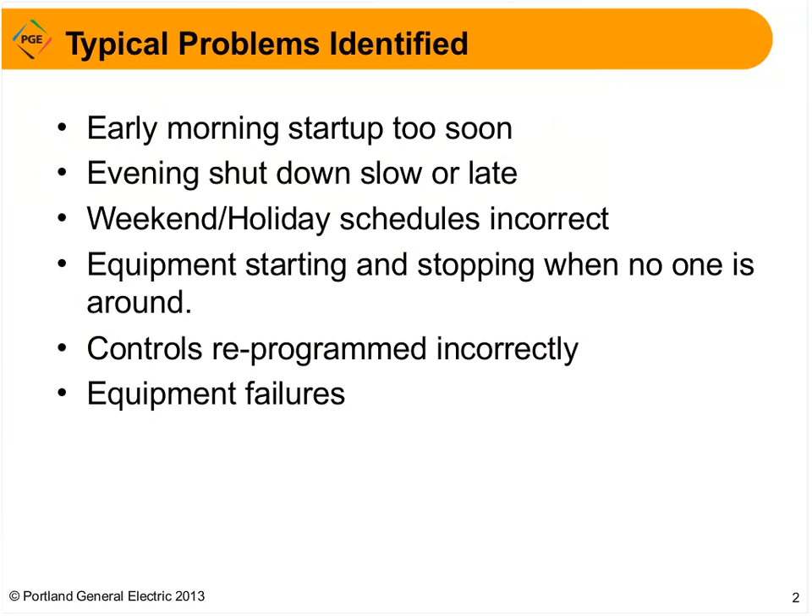Finally, something included in the packet that we'll be sending you is the facility checklist. That is something you can use, if you want, to provide your operating schedules in comparison to what the charts are actually showing you within Energy Expert, just to make sure that those match and line up, so that if there are any issues with data, you can let us know. But this is just something additional that we provided in that packet.

So I'll go ahead and open up the Energy Expert applications, and that is going to be using a different URL than you're accustomed to. At the old legacy version, we would have been going to www.myworksite.com, and in this case, we'll be using www.northwriteinc.com. I shared my desktop so that you can see that application.

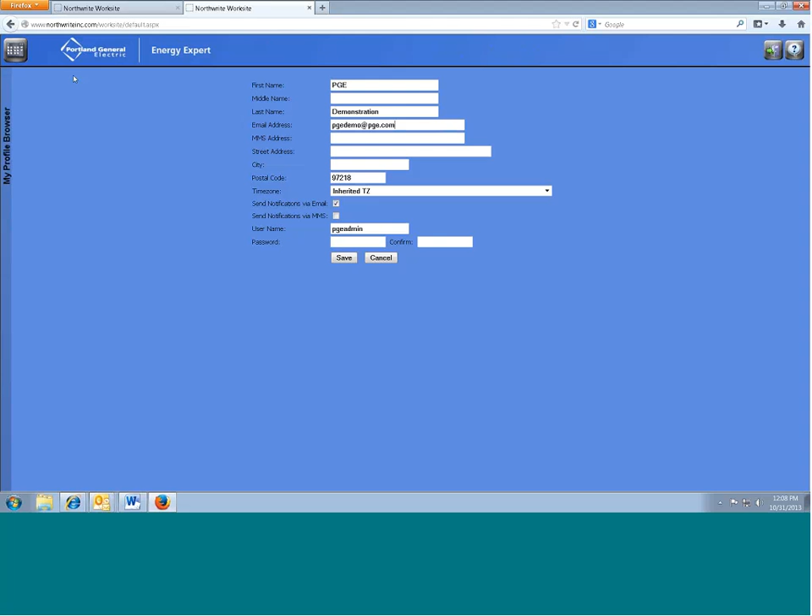Going back to the desktop, I'll show you real quick some support options available for anyone not able to attend a training. There's a lot of additional documentation available, either written or in video format. Each of these links are the tools available, and as you click into these, it opens up a page with thumbnails of videos recorded for various functionality within each tool. These are about 2 to 3 minute short instructional videos. And this link up here is written help content, so you have a couple different ways of accessing instructional material.

As I said, these were some administrative applications. If you have some schedules set up, and I'll be showing you how to do that, this is an application that just lets you administer that. It's very straightforward, and we have the video on that as well, so I probably won't be covering it unless anyone has specific questions. Then the dashboard sort of interacts with both the energy modeling and energy charting tools, and I'll be showing you that as well.

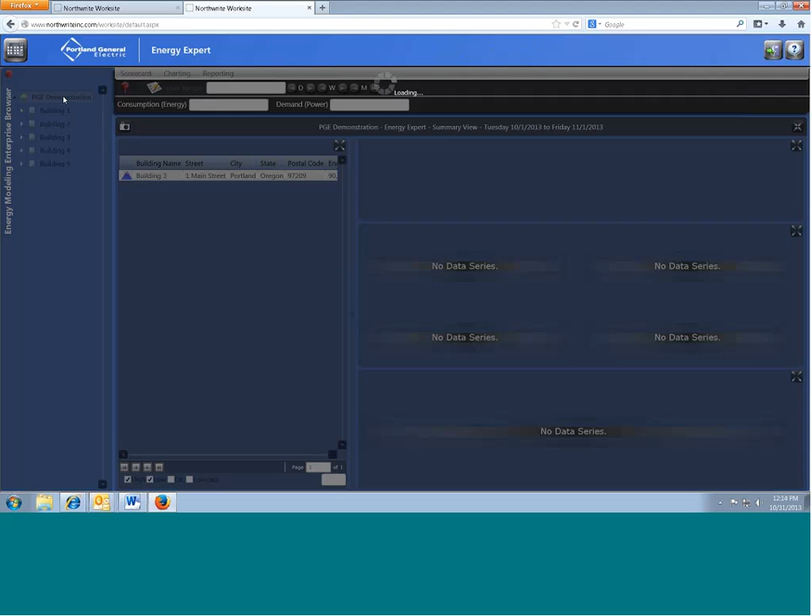But first, we'll go into the energy modeling tool, and we launch right into it. I've already loaded it today, so it brought me right in, but it will initially take about a minute or so to load. What I'm seeing here is the demonstration site at the building level, and I'm going to move this up to the top level. Whatever I've selected here in the left navigation determines the data on the right. What I'm seeing here is a scorecard view, which is the default screen selection.

And this shows a multi-site organization, so we see that there are multiple sites being charted here. And I can filter this to get all of the buildings in the site list here.

The first thing you'll notice, there's a lot of green here. What this is saying is that for the time period selected, the month of October, and for the whole organization, this was the actual energy consumption for that period as compared to the expected energy consumption. So it was within a 10% difference.

So the performance of that period is rated okay. We have a deviation band of a 10% range as a default, and so as long as the actual and expected energy is within that 10% range, it would be marked as a green or okay day.

As soon as you go outside those deviations, it would indicate a high or a low day. In this case, we don't have any high days. We just have all within the normal range, and one here that was actually below the normal range of consumption. How that's calculated is on an hourly basis, according to the interval data for the baseline period and in relation to the hourly temperatures for that particular day and hour.

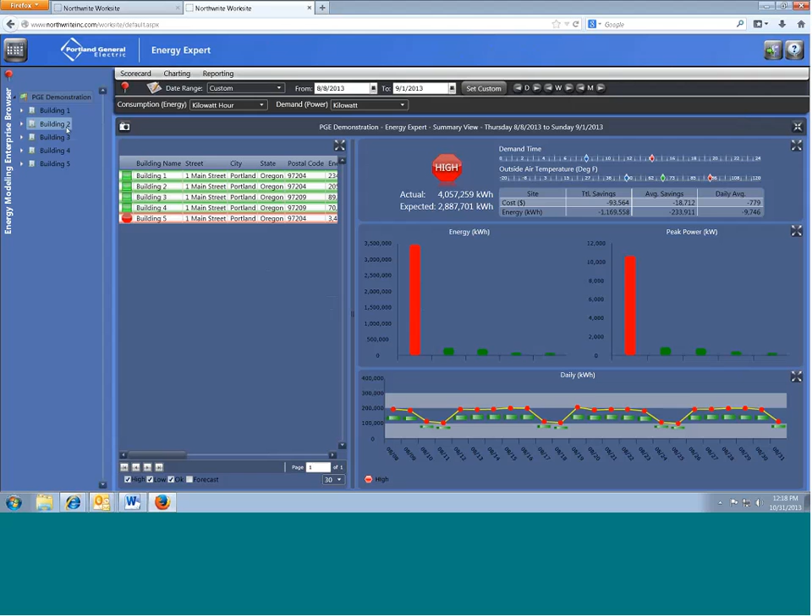So now I'm going to just drill down into a more specific level into the building. And for some people who have multiple meters, they would need to drill even further. For a sub-meter, in this particular instance, there's only one meter per building, so you're going to see the same data at each level. But for anybody that has multiple meters within a building, they would just need to select the appropriate energy expert node here.

This, again, we're still at a multi-day range, and you can see there's a pattern here with their startup on Sunday night and Monday. So things are kind of normal for this site through the week. This is a Saturday, I believe, and these are Sundays.

So we're seeing a definite issue here with this being a high day, and these all falling in the normal range. And you probably gathered the yellow line is the actual consumption for this building.

And we can see the impact of this too in terms of cost. So in this case, over this period of time, the difference in energy consumption between what the models expected and the actual was a negative 15,990 kilowatt hours. And that translates using a blended rate that we get from PGE, that we put into the software according to the location, to a negative 1279. So we're able to calculate that in terms of dollars as well as energy.

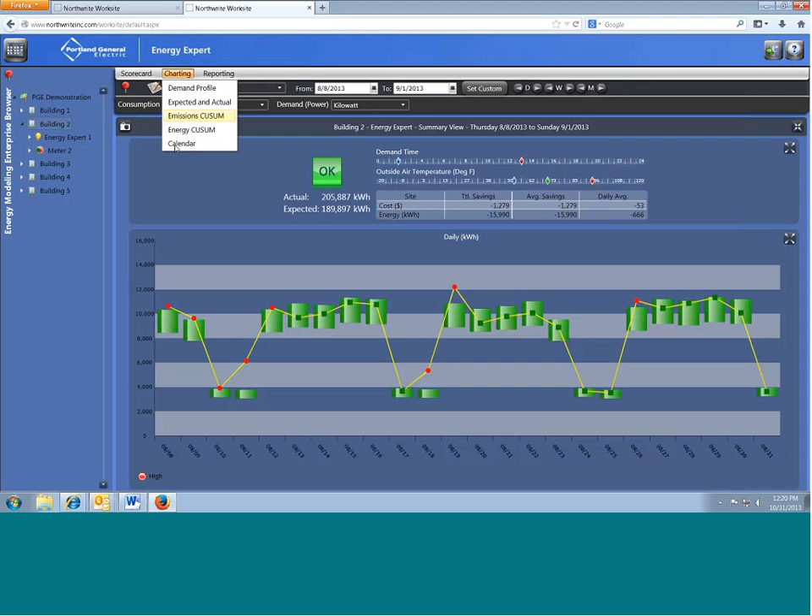So now I'm going to just jump over to the calendar to show you this same pattern over in the calendar view, to kind of give you an example of how you would see the same issues that are happening at this building.

Since we were seeing those red days on Sundays and Mondays, that's also what we're seeing here in the startup on Monday - a really early startup. So maybe they're starting earlier than normal, but that's what the model's telling us: on these particular days, in relationship to their baseline, the facility is using more energy than usual, and it's been given a high overall day. You can also see at the hourly level how that changes from red to certain parts of the day that are actually normal or low.

So you can look down to an hourly level of what the performance is for a particular site. And while I'm on this view, I'll show you what this little yellow indicator is - it allows you to see if there's been any notations made to address any particular anomalies or issues that are identified.

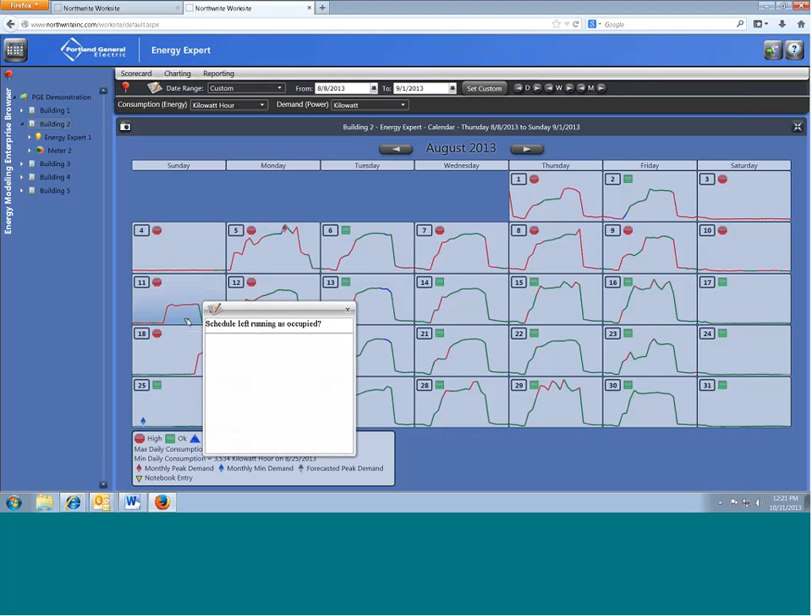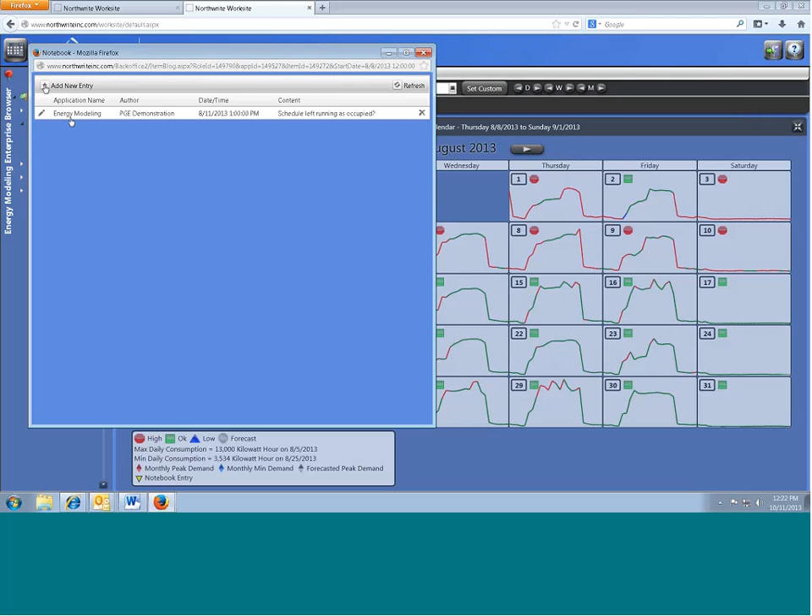Rolling over that little icon will show you what the note was that was left. In this case, we weren't really sure what happened at this building, but assumed that maybe a schedule was left running, and this could be confirmed by a facility manager. The note was actually input by clicking on this little notebook icon up at the top. That brings up a pop-up, so you would have to have your pop-ups enabled to see this interactive screen. This is the current note, so we can click on that to add more detail, or continue to make notes, or add another entry. That's the functionality of the note taking.

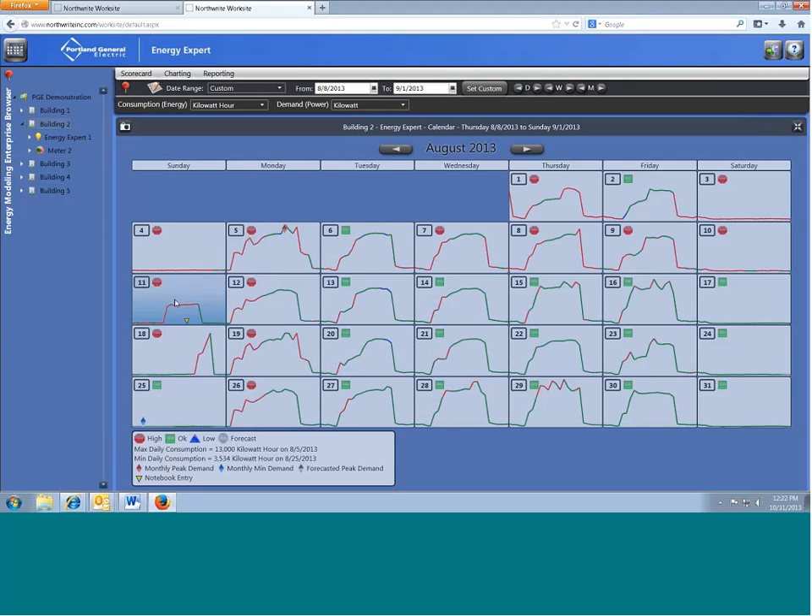If there's a significant day you probably want to look at in more detail, there's a few here, but I'll click on the 11th, and this will take us to the load profile, the demand profile for that particular day, giving us more detail about what's going on. Typically, the model's saying the actual should have continued throughout the day as a flat line, but on this particular day, it looks like it was occupied, or at least the schedule said the building was going to be occupied. So this gives us the 24-hour detailed look at that.

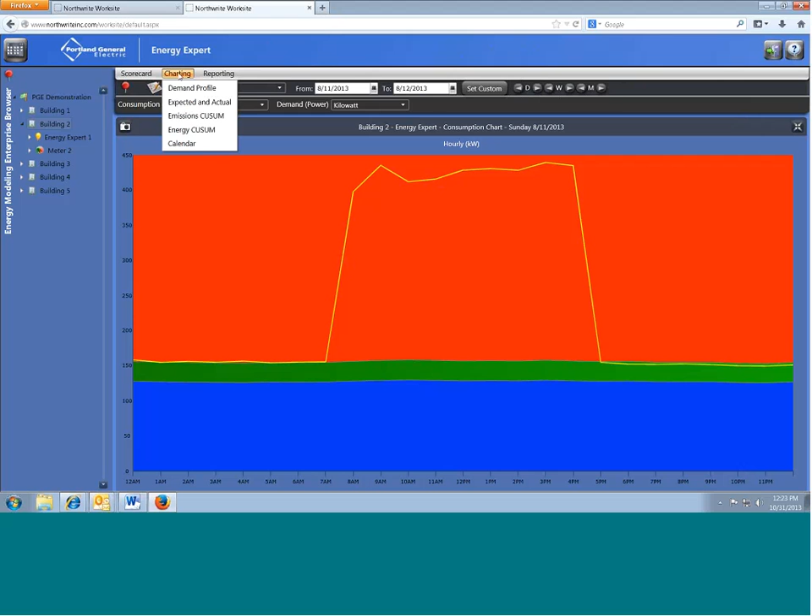Some other charting options are the demand profile, and this one is model independent. This is just charting the actual data in relation to different parameters available here on the left, where you can trace over different profiles within the data set that we have available.

So if you have several years of data, we're able to look at averages over a longer period of time, and you can also trace that with a comparison from weekday to weekend. This is your selected day, and this can also be a range of days. This just happens to be a single day, and we can expand this to include multiple days.

You can see it just adds more of the load profiles prior to the selected day. As you roll over these, you can get a tooltip that would come up - again, I think with the meeting format they're not coming up for some reason, but hopefully on your own there they are. There's a bit of a delay, I think. So these will provide the dates of the actual loads here.

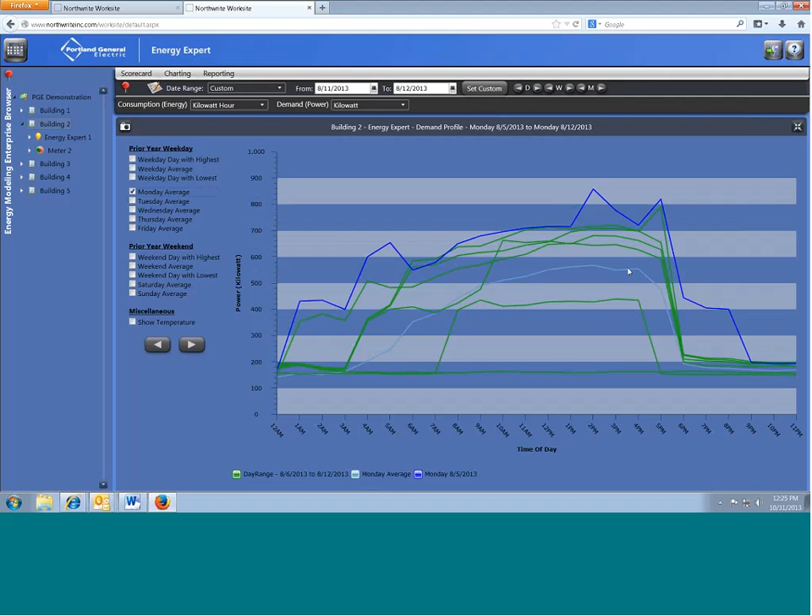And then if I want to trace that against an average, since this is a Monday, I might want to look at the Monday average - it would trace that in a different color, this light blue line here. So it was a lot higher. Of course, as you're looking at this, you can back up your selected day however you want using the buttons up at the top. We can also just look at the weekday average, not just a Monday, but the actual weekday, and that's really similar to that Monday average, like we would expect.

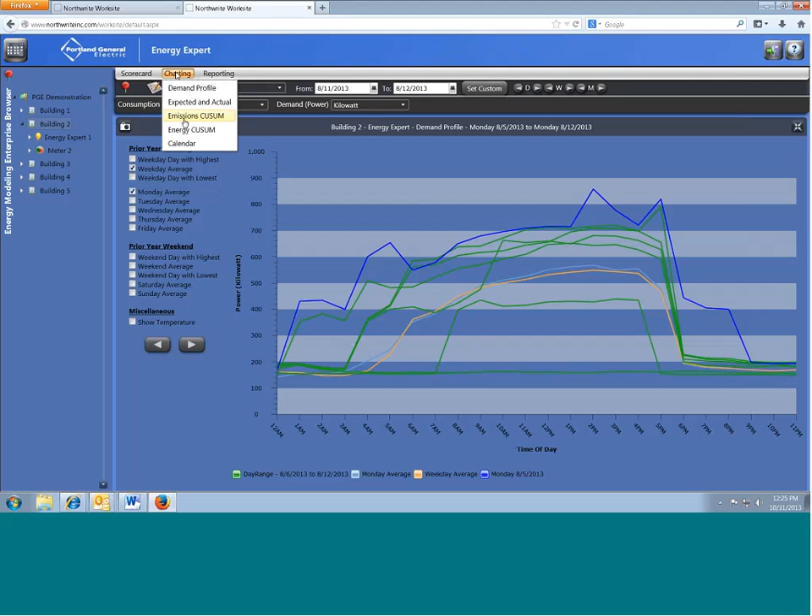Some of the other charting functions available - one that's useful, especially if you're doing any improvements in the facility, can actually measure the impact of those. What this chart does is provide a visual of the savings, the cumulative savings that result from whatever that improvement was. So again, you probably have a custom period, or maybe you might want to look at your whole post-baseline period to see what the savings are. That's going to be different for everyone, but we'll just say, in this case, we'll look at the entire year-to-date savings.

For this building, I wouldn't expect a positive result since we saw a lot of red days. That's going to correlate to a cost and not a savings. So the line will go left to right, downward, instead of left to right, upward, which is what we want to see. But this is how you would use this particular chart to assess the impact of any energy savings measures that were put in place.

Since it's a whole year, I think that's why it's taking a little time. There we go. So we can see it really didn't improve. It was pretty flat here until the warmer months. They really had some issues, and we kind of saw that in August for sure. So looks like they have a little work to do here.

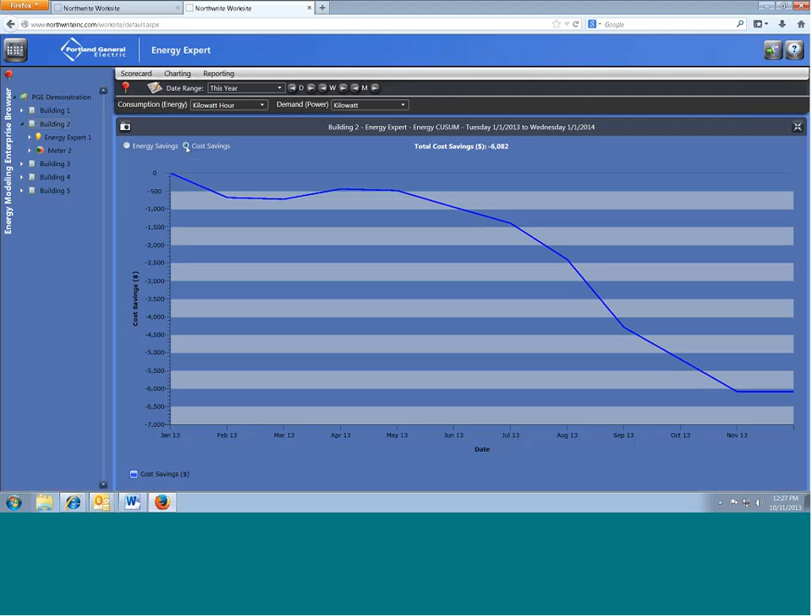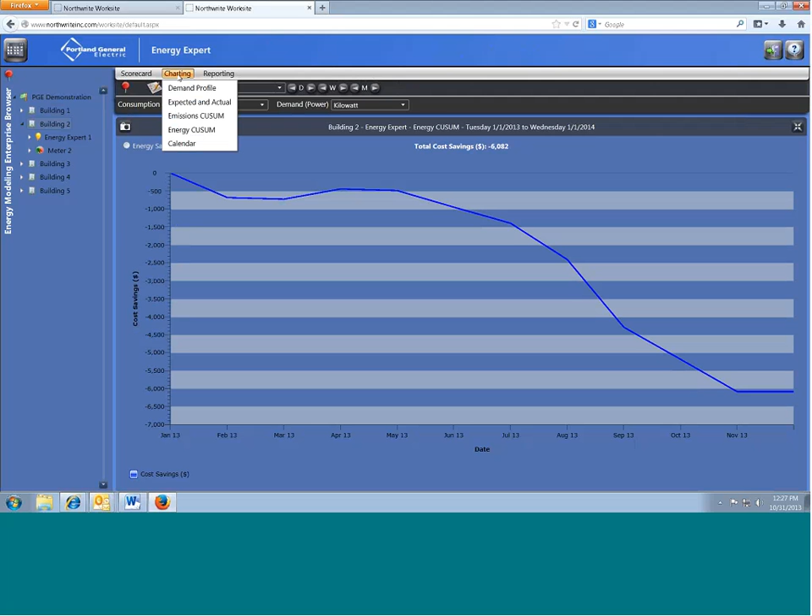Moving on to some other charts that are available. The emissions CUSUM is another one that you may or may not use, but it's there for your use or reporting. This chart just provides a tracking of the emissions put out per kWh, and depending on the time period selected, this would be the total CO2. We also do the other greenhouse gases here, but the default setting is CO2.

This does retain the last date range selection, so I'm still on the entire year, which is why we've got a little delay here. But when this displays, we have charting of the actual CO2 emissions, and we can also look at it in terms of the model and show how it's reduced. This is a factor of the performance at that meter. So we're always going to be accumulating CO2 emissions, but the red line is there to show the savings trend.

In this case, like we saw before, we had a downward savings trend. So we don't have positive reductions, we have negative reductions. It's going in that same relationship curve as we saw on the CUSUM chart.

While I'm here, I'm just going to go over the reporting functionality. We either have these already — these are some canned reports, the enterprise summary or the daily details. These just provide another way of looking at the data over time.

It also lets you drill into the data so you can see what's going on hour by hour, and even at the data collection level that we're using to determine that expected energy value you see on the scorecard.

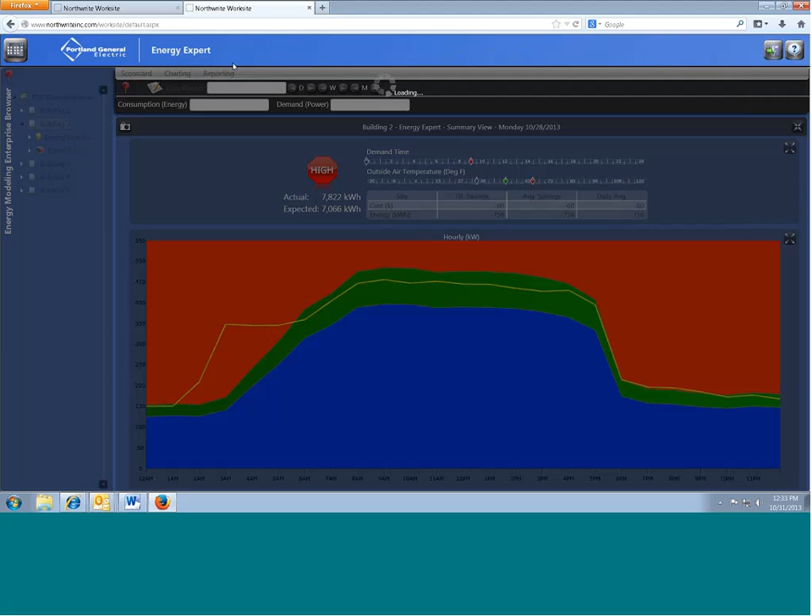Going back to the scorecard, another option for reporting is the X-card functionality. If any of you have already set these up, you've put in your email address and enabled the box that allows notifications to come through on the My Profile application. Once you've done that, you can start customizing what views you want to appear as a scheduled X card.

I'm just waiting for that screen to come back. We'll give it a minute here.

These X cards will show up in your dashboard, and I'll show you that too, how those display as thumbnails that you can delete and manage your scheduled X cards, and they also show up in your inbox.

So I think since I'm having some issues here, I'm going to just relog in. So you might have to bear with me here for just a moment.

As I was mentioning earlier, I'd already loaded some of these, so now you're going to experience the actual loading of each of the tools. But I first thought I would just go into the dashboard, since we were talking about how the X cards render to your dashboard. So in this demonstration site, some of the X cards I've taken and scheduled will show up as thumbnails.

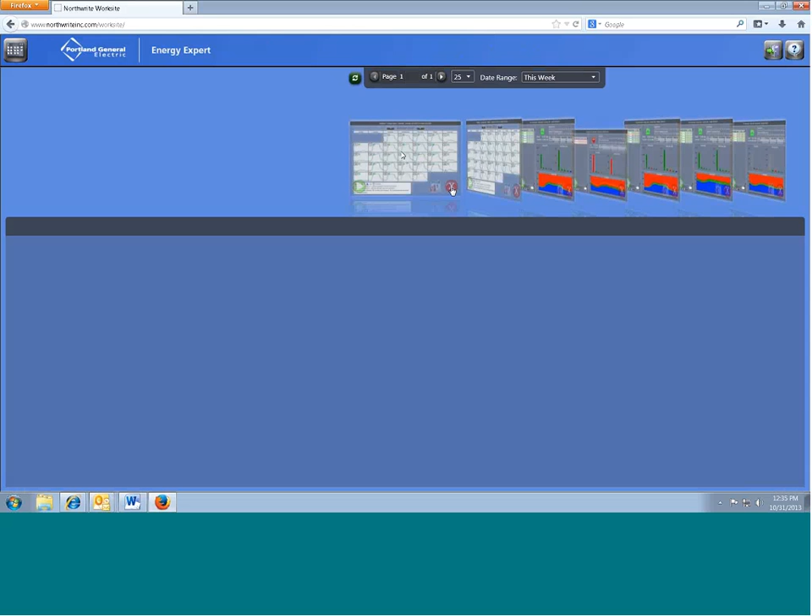So they can be deleted via the dashboard. This will also serve as a way to launch back into the application.

So if, for instance, the issue we saw at building 2 in August, we might have taken an X card of that as a single screenshot, and that would appear here in the carousel, and you would be able to come back to that and launch right back into that same scorecard view if you wanted to.

Oh, and it would also go to your email box if you wanted to forward that around to other folks in the organization. That's kind of the intent behind that. So this will launch you back into the application.

I'm highlighting this little calendar icon. This will delete your schedule if, for example, this one is a daily schedule of the scorecard. This would delete that, and this would just delete the thumbnail from your carousel.

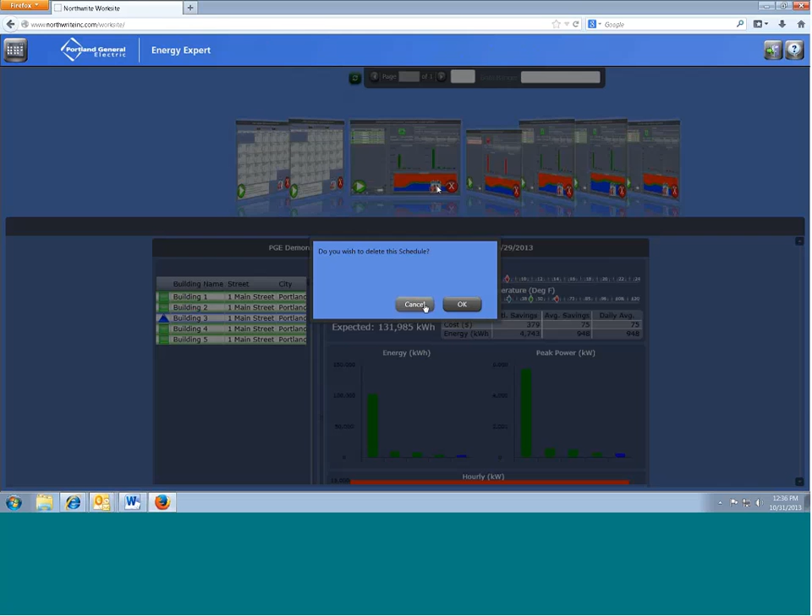So I'll go ahead and, actually, it does let you confirm your deletion, so I'll cancel that. And I'll go ahead and launch back into the application. So this will get us back into Energy Expert.

I've pretty much gone through all the functionalities I plan to show. So if anyone has any questions, feel free to ask them now. Otherwise, I'll pass this back over to Will, who has some specific examples of issues and problems with scheduling that he's been able to see with some real customers.

Okay, thanks, Gina. Like she said, I'll be going over some specific examples we found both recently and in years past. This one right here is a scorecard example. This customer, I was looking at the application one day, and I noticed this customer had an odd startup. You see down here at around 5 p.m., it starts to get a higher load, and this is on a Sunday when it's normally closed and unoccupied. So this struck me as kind of odd.

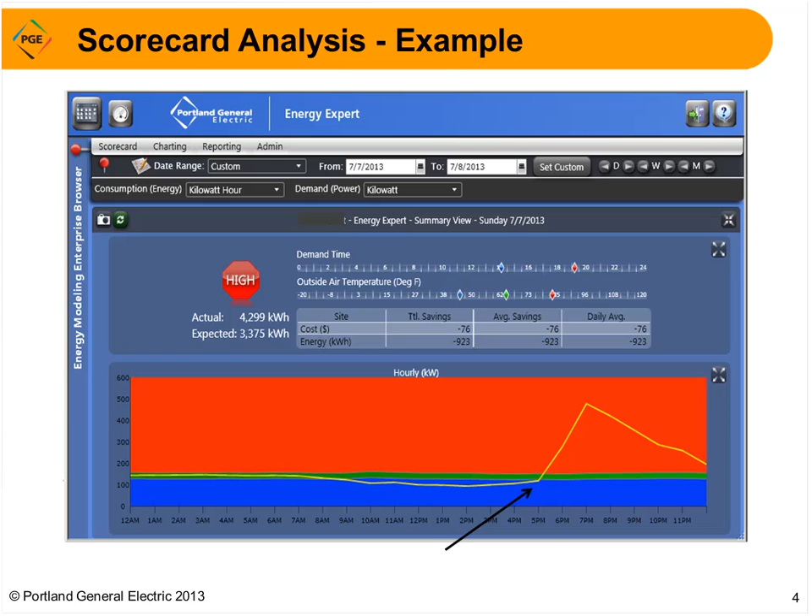Here's another way of looking at it. I was looking at that first day, and okay, so you'll see over on the left-hand side here by the arrow, it shows the ramp up on that day. As you notice, the previous days, if you look at both Saturday and Sunday, you'll notice that they don't have days like this.

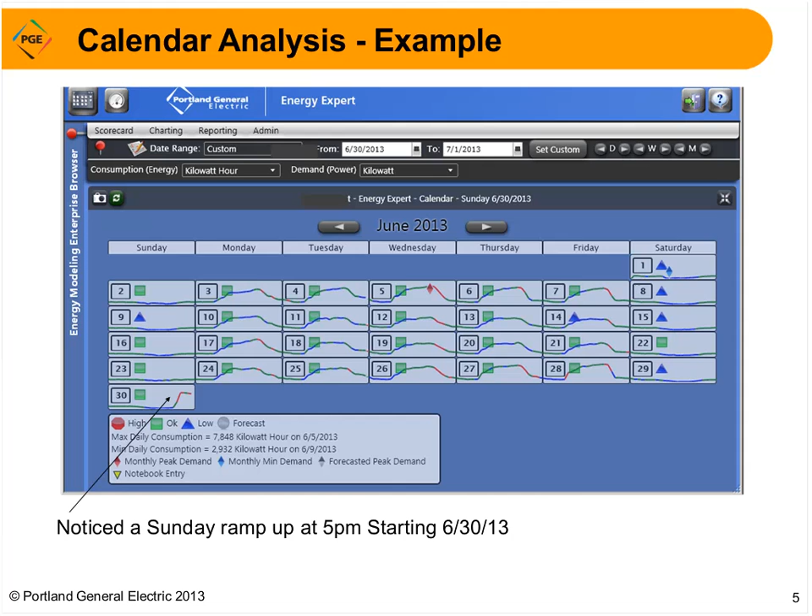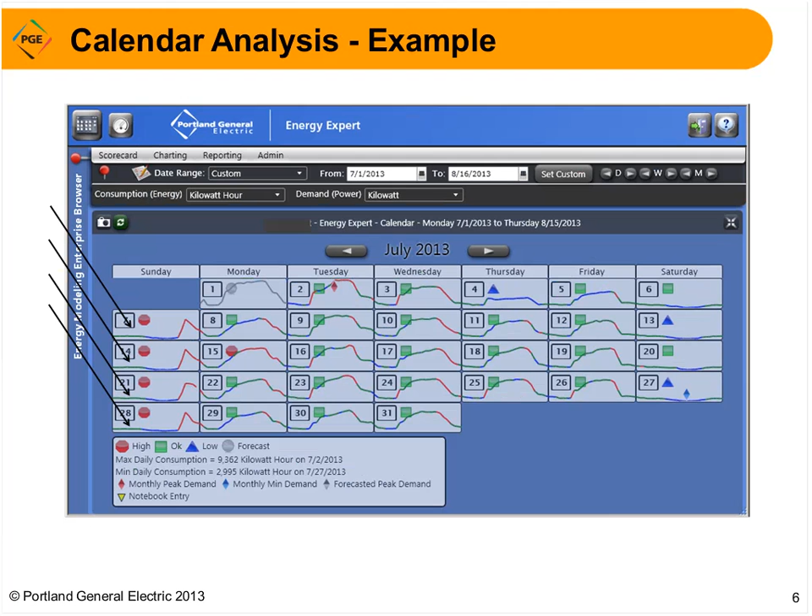If you go forward a month, you'll see every Sunday since that June 30th is like that as well. And I thought, boy, this is sure strange. I looked back even a year back to the same months, and they didn't have this either. I kept going, and August had it as well. And I thought, boy, that's just strange.

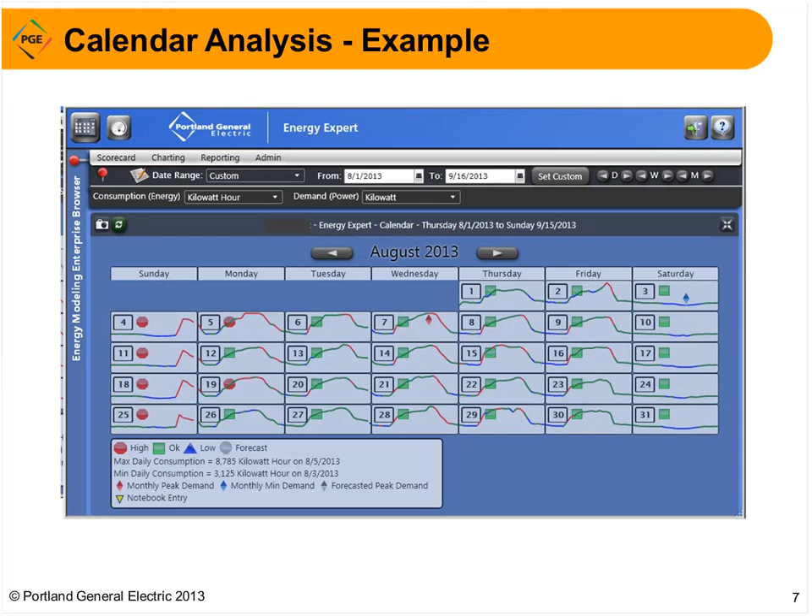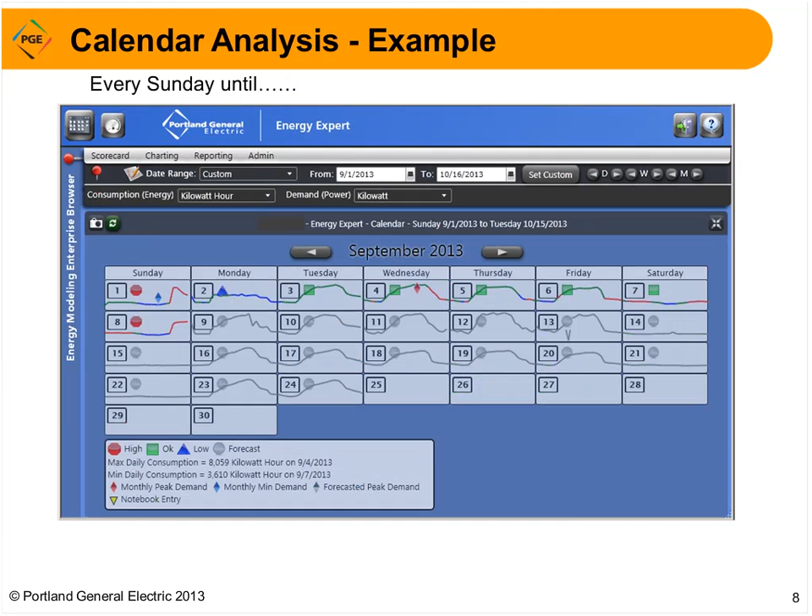You know, maybe I should call the customer, see if there's anything wrong. So I notified the customer first week of September, or I should say on the 10th, and I mentioned, well, I'm seeing this odd startup on a Sunday. Do you guys have anything going? Is there a different type of event going on? And they said, no, everything is business as usual, and should be nothing going on Sunday.

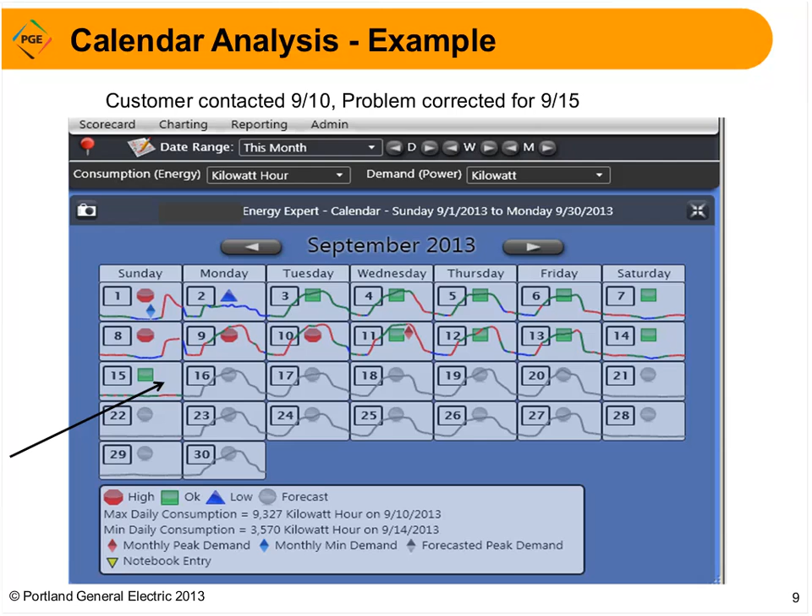So they put their HVAC tech on it, and here's what they found. The technician found that 3 main air handlers for that building were put on a schedule to start at approximately 6 p.m. and shut off at approximately midnight on Sundays. The schedule was programmed sometime in the week prior to June 30th, and it looks like it was added for a special event and just not removed. The technician then removed that schedule from the Sunday controls, and that stopped the rise in power on Sunday evening.

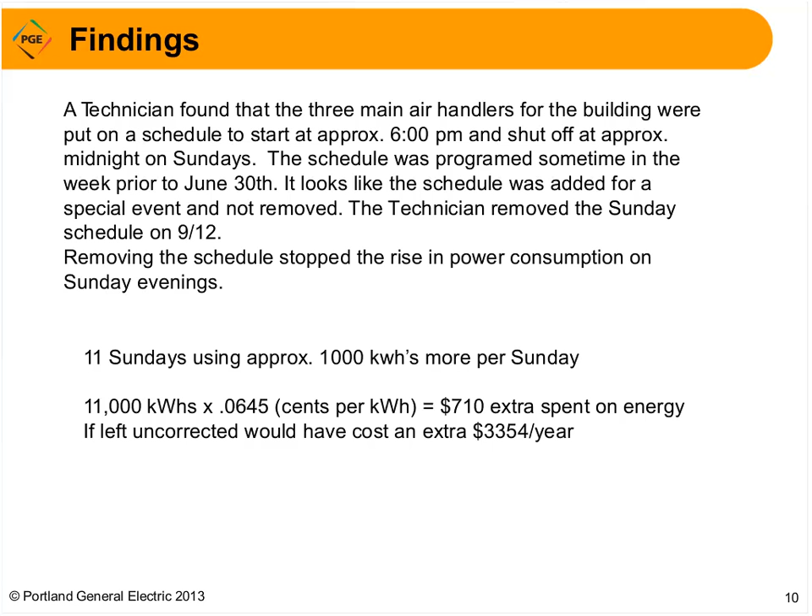So looking at this, going back, we had 11 Sundays that ramped up for no reason at approximately 1,000 kilowatt hours per Sunday. If you add that up, over just those couple months of time, it was an extra $710 they spent on energy when they didn't need to. If this would have been left uncorrected, it would have cost them an extra $3,354 a year approximately.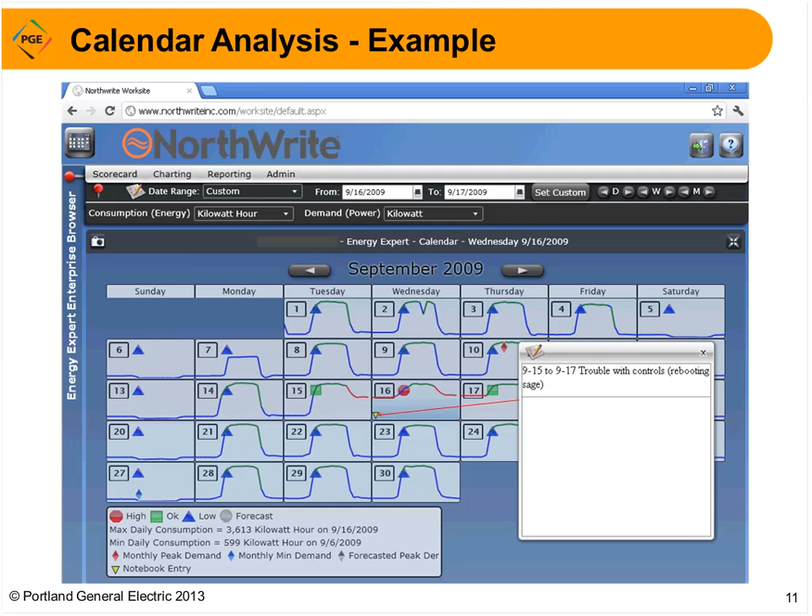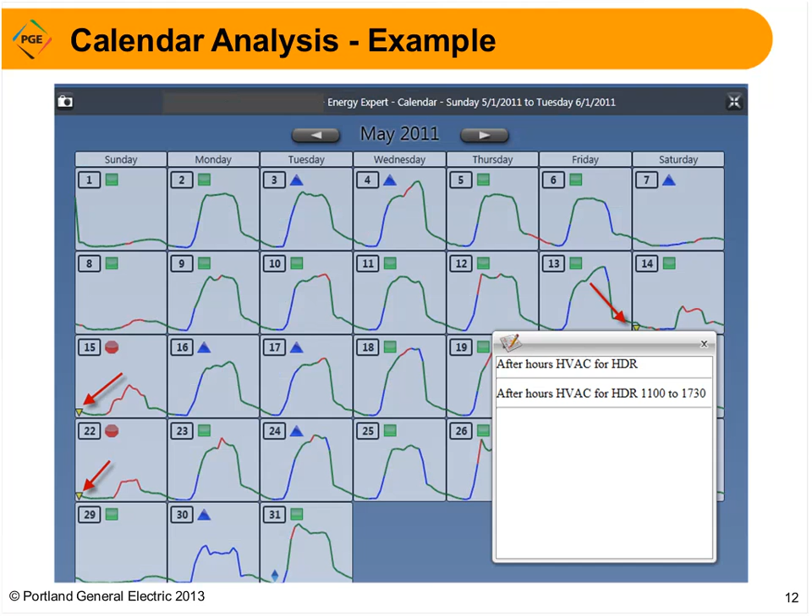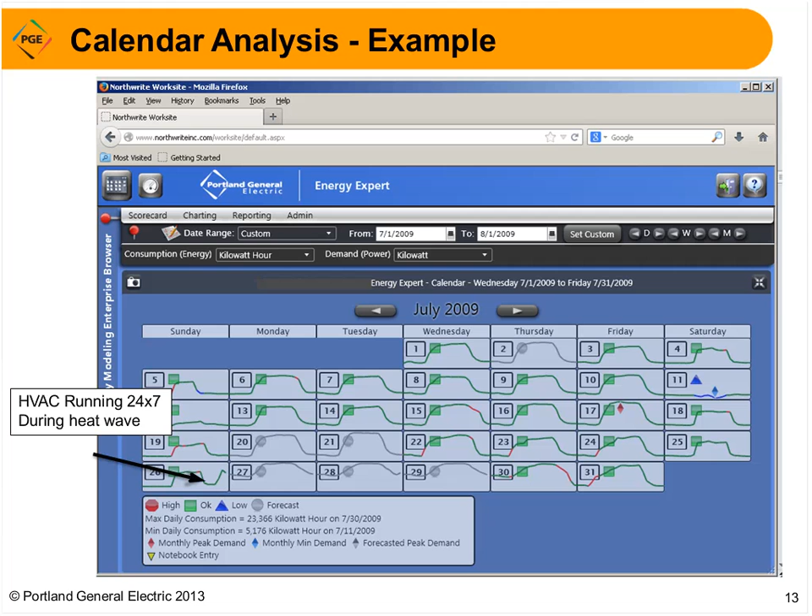So this was actually, you'll see during a heat wave, they have the HVAC running 24/7. As you'll see down here, the 26th going into the 27th, the load does not drop down as usual and stays up pretty high, trying to keep the building to a comfortable temperature.

On the flip side of that, we have an example here. It was a cold spell, and you'll notice the days in gray as well, where the facility person there was just trying to keep the temperature in the building at a decent level and not too cold. So it obviously used more power, and here again the temperature was out of range, so it was colder than normal, so it didn't calculate a high, low, or okay.

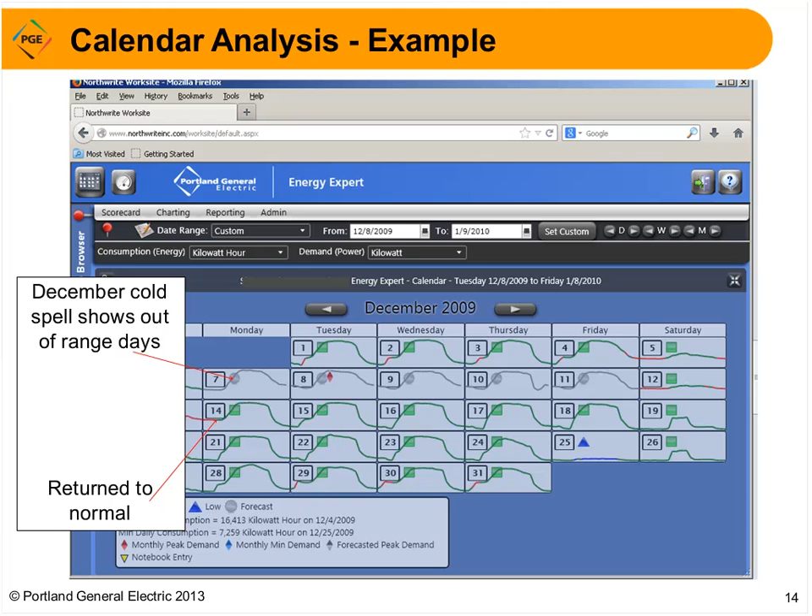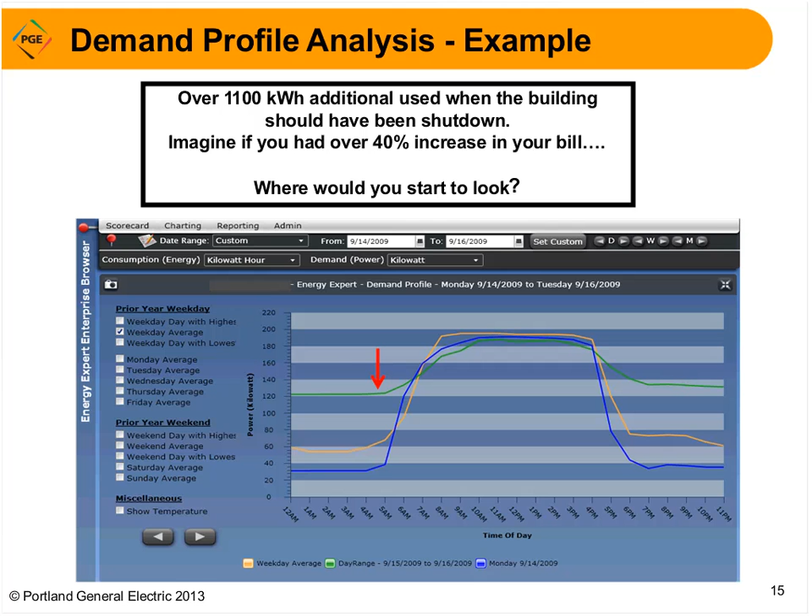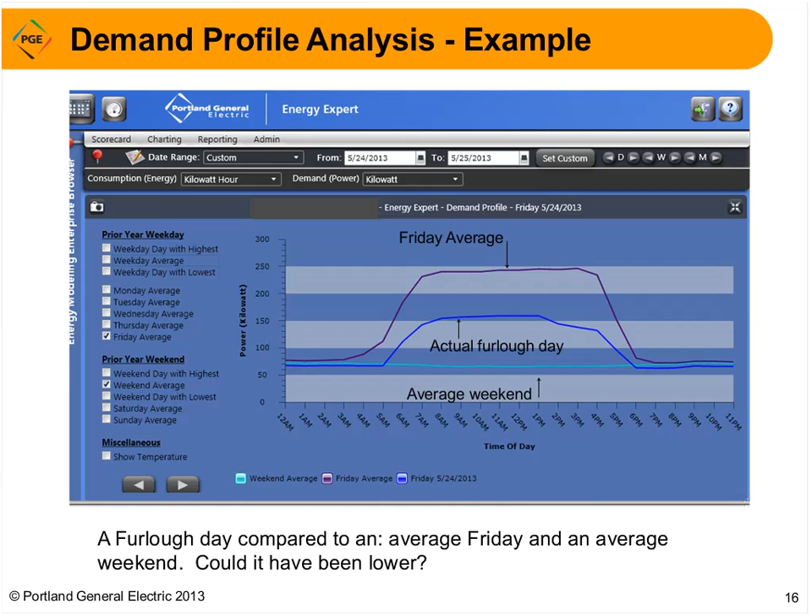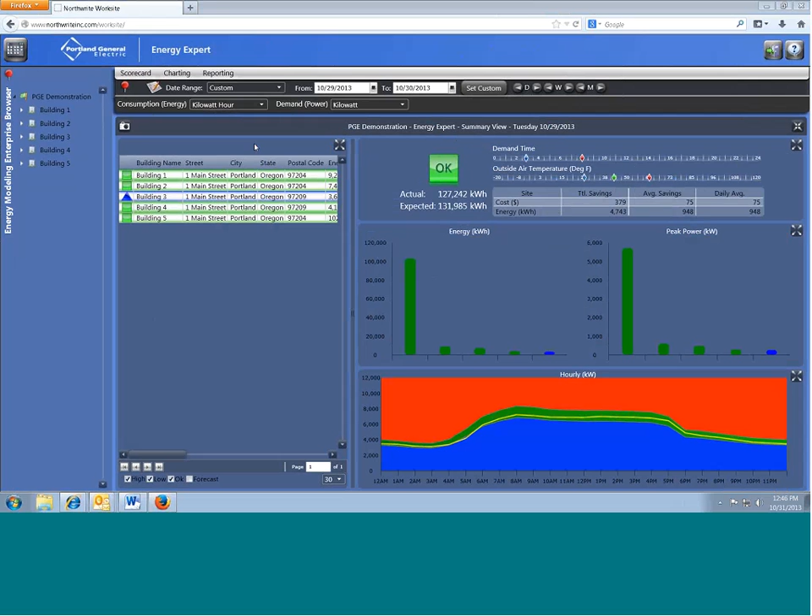So I think what I'll do is try to get back to the reports that I couldn't show you earlier. And since we're back in Energy Expert anyway, just before I go into the energy charting tool, I'll try again here to see if we can get the daily details report to display, because this can be a really helpful tool, especially for an organization with a lot of different buildings, because as you can see, it gives you a quick, at-a-glance view of some issues across the portfolio.

So this gray area, like Will was saying, this can indicate no data, and I think that's probably what the case is here. It can also indicate when, as Will explained, if there is data but the model wasn't able to find similar days within that same temperature range at each hour, then the model would equate the actual to the expected. We don't predict or provide a performance rating, and that can get confusing. So if there are any questions on that, if that comes up on any of your data, we can explain that. It's also explained in the training guide that you'll be receiving.

But anyway, the color patterns here just give you an idea of what's happening hour by hour, and this is just the course of one day. We can also look at this over multiple days, and you can even drill into a particular hour. So maybe for these high days, you might be interested in seeing more detail. So I'm going to actually click on that box.

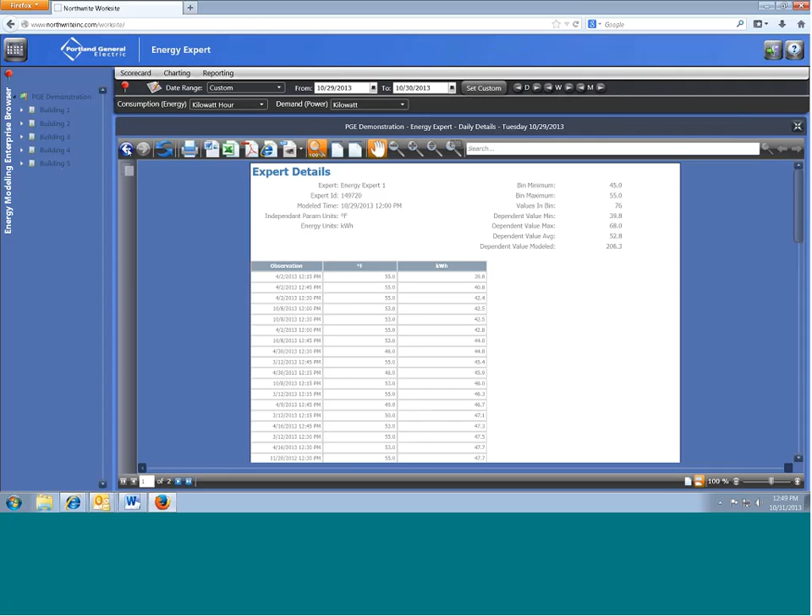And so I'm going to drill into that 12 o'clock hour. This is all of the data within the baseline period at the 12 o'clock hour that matched the weather data. So within a 5-degree range, all the interval data that occurred at that weather range is pulled, and we use the median of all that data to determine the expected consumption for that particular hour and day of the week. So this model looks at time of day, day of week, and weather. That's probably more information than most people need, but it's there if you're ever asked to explain that or want to understand the model more clearly.

So now I'll go back to the energy charting tool. That was the next one we were going to look at, and that's this icon here on your desktop. It'll take a second to load. These charts are going to determine what data is displayed here on the right by what selection is made on the left here in the tree. And just like within Energy Expert, as you drill into the tree, you'll expand the meters available within a building, or if you have a multi-level organization, you can arrange this however you want to. In this case, we just have 5 building locations and a single meter at each building.

Again, looking at building 2, I'm just going to go through some of the charting capabilities that we have. First of all, probably the main chart that has most of the functionality available is this multi-point chart, which allows you to look at a single point compared to itself, or you can look at points across the organization.

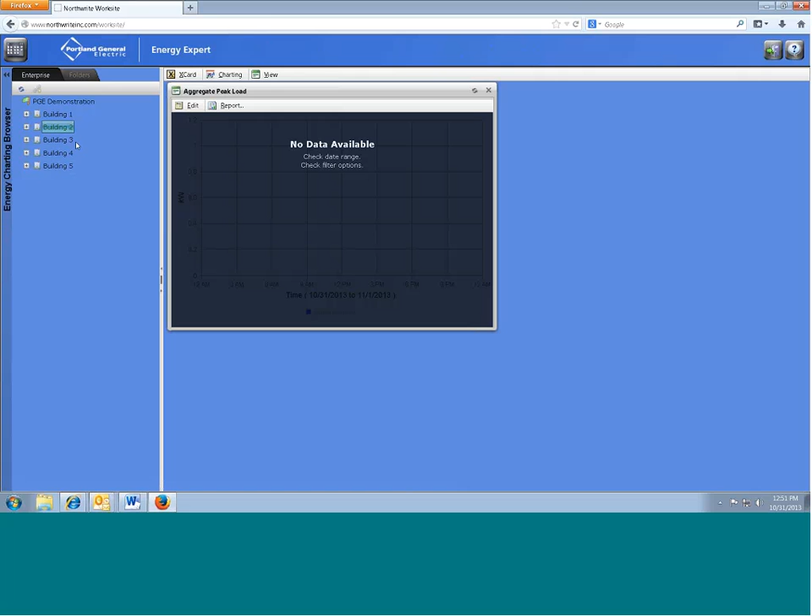This message here saying no data available is for the current day. We don't have a data logger for this particular site - we're acquiring the data through files we receive at the end of the day. So the latest date available would be for yesterday. This isn't always true for everyone, depending on how we're getting the data, but in this case, we have yesterday's data.

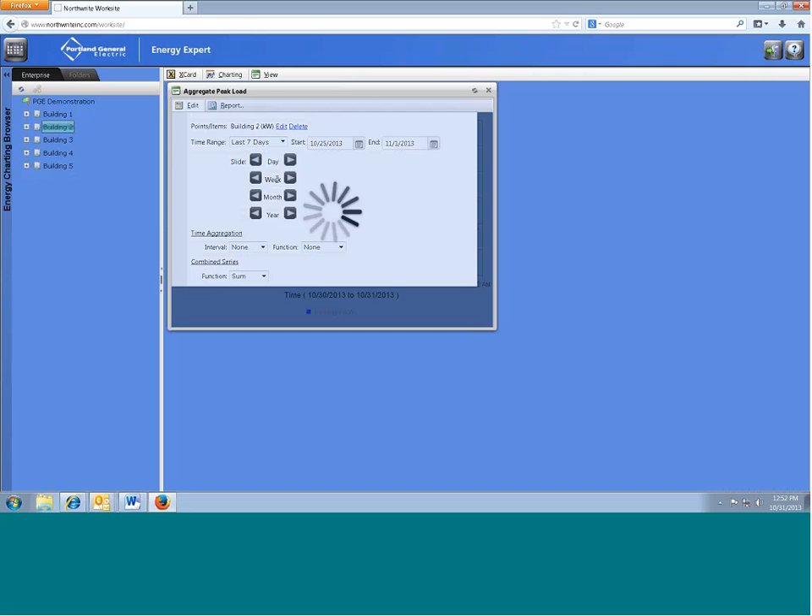This is the load profile for that single day. By pulling the edit panel down, we can look at a variety of different date ranges. These rolling last 7, 14, and 31 day options were just recently added after receiving some input from a user, so we're able to look at the last 7 days from the current day.

We can chart this against another building by just clicking on the selection on the left. A little dialog box will appear to confirm adding that new data series. Once you click on that, it's going to chart the second point as well as an aggregate of both points in black. As you roll over these different plots, it will provide the identification of the site, as well as the value and the time associated with the demand value.

Clicking on this edit panel again, I can change some of my selections here and customize the data in terms of the aggregation, the time range, and even the points available.

Looking at the time aggregation, the default is no aggregation. Depending on how we're receiving the data, typically in a 15-minute interval, you're going to see the data plotted in those 15-minute intervals. But depending on the time frame you're looking at, you may want a more coarse or more refined interval. So you can do hourly, daily, monthly, or annually aggregation, and we can sum, average, or do a minimum or maximum.

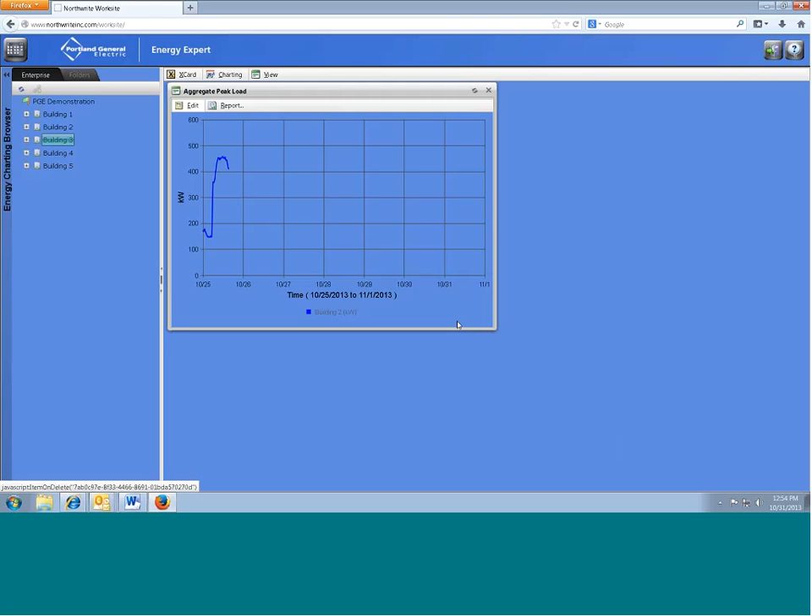One use of this chart that I always like to show people, because it isn't super intuitive or obvious, is to chart the same point on a repetitive basis so you can do a time offset of that same point. So I deleted building 3, and I want to chart this building 2 in different time offsets.

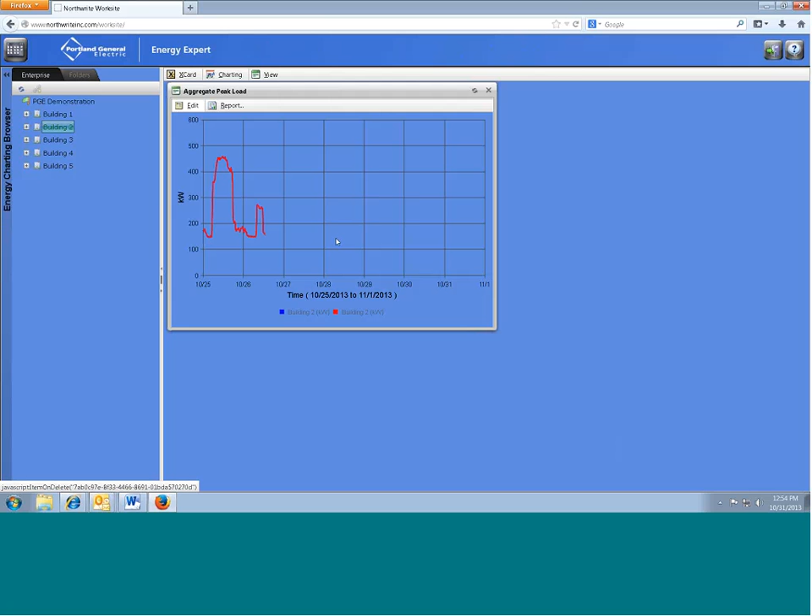You just repeat the selection and repeat that same sequence of adding the new series and confirming it. It's going to draw over itself, so you're not going to see each plot separately.

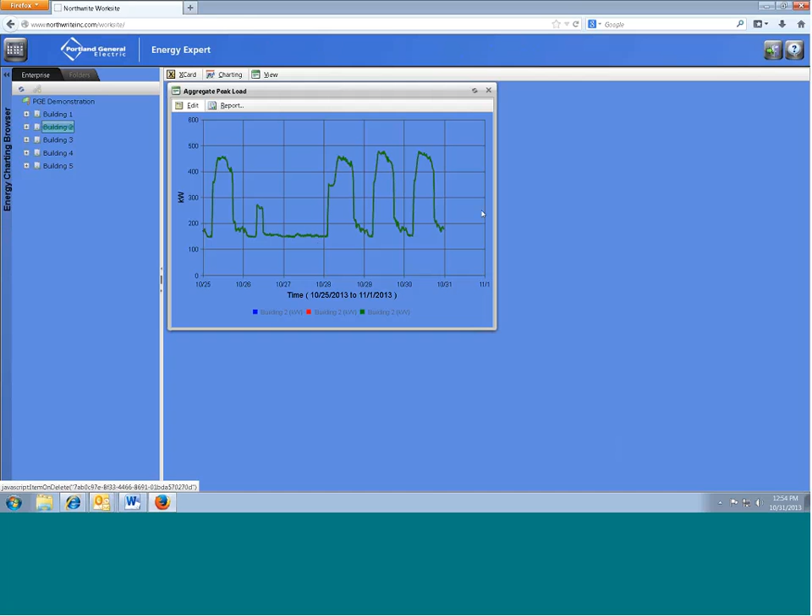Going back to the edit panel, you can edit these individual points. We'll leave the first one alone, then click on the edit link for the second series, and select a different time offset. Since we're looking at the last 7 days, you might want to change this to a single day to make it more clear what you're looking at. We'll do 2 weeks prior, which will chart that point 2 weeks prior to the last 7 days.

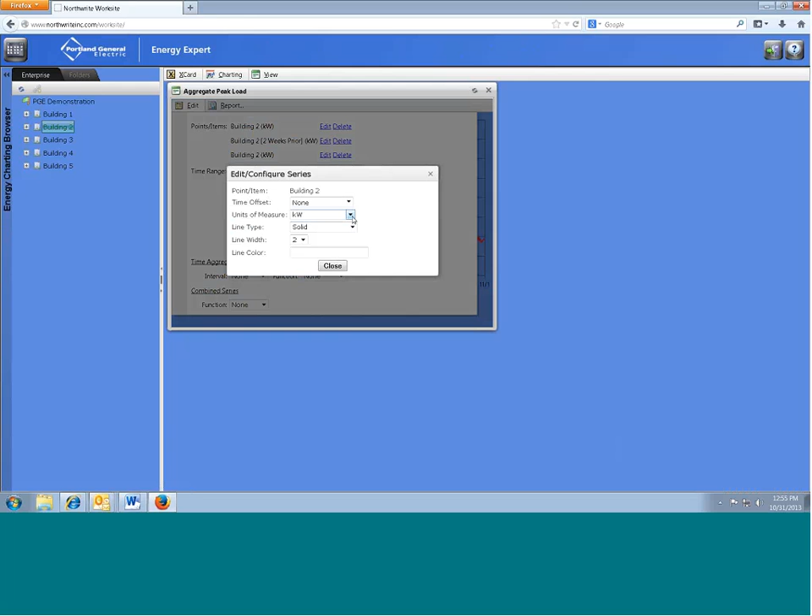And so you can really identify some issues here. It's very different than that first data series. And then if we want to see another, we'll click on the edit link for the third data point and select another time offset of maybe 2 months prior. We'll just randomly choose that. You can change the look, width, and color of the line too if you're interested in making sure it stands out, but the application will choose one for you, of course, too.

So probably if we're selecting a single day, it's probably easier to calculate what those date periods are reflecting, but you can actually roll over them too and get what that data is. And you can click on the report heading. Oh, there's the delay. So here's the rollover tooltip that provides you what time and value you're looking at.

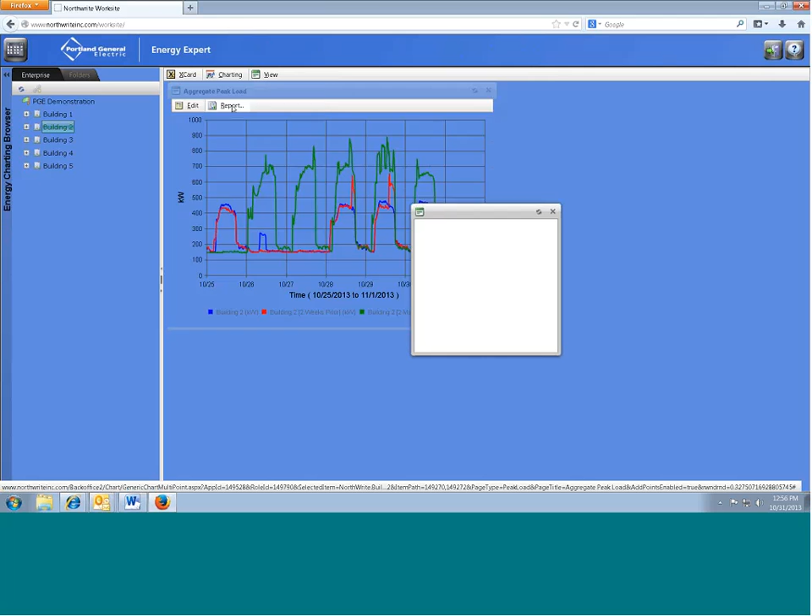And the report heading is available across all charts within the energy charting tool, and this just gives you the actual data for each plot within the chart. So we had 3 different data points, so this would give us all three points, and it distinguishes what time offset that we selected here in this column.

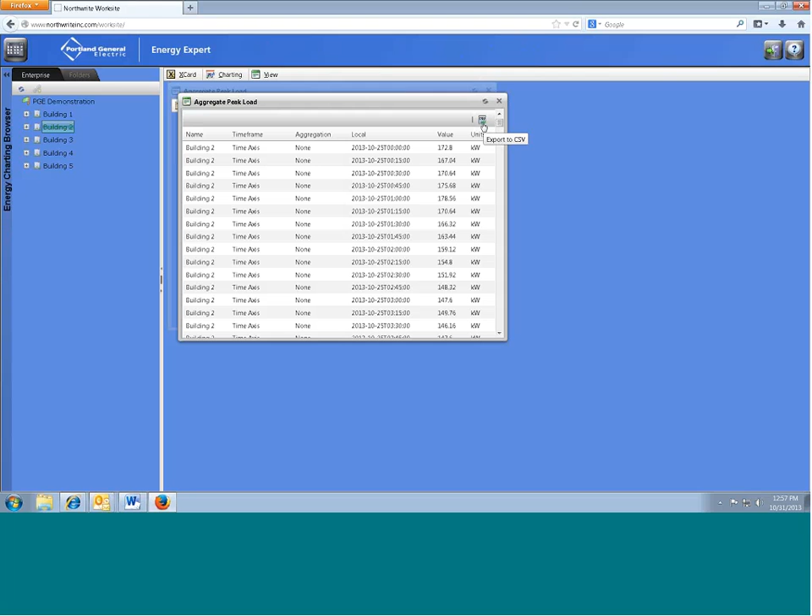You can also export this, so if you want an Excel file to manipulate the data, or just download that, the export feature will allow you to keep that data. So I'm just going to close that out and close the aggregate peak load chart as well. Then go down the list here. The next one is a building summary, and that's probably more applicable to a multi-site location. So I'm going to go back up to the enterprise level and choose the building summary chart.

This one just gives you a different way of looking at overall consumption by building. And this can be, different energy metrics are available within this chart, but the default view is going to be total energy. You can see this building 5, we're not sure if this is an anomaly or this is an actual typical consumption, but you can see this kind of throws off the scaling just a little because of the variance here.

But this is showing us the Monday or the full week of data, but we can actually filter that to include different day types. If you're interested in just looking at weekends, just deselect the weekdays and we'll draw that. Also, as I said, this would be different energy metrics or power. So different options available are listed here, as well as energy and power intensity.

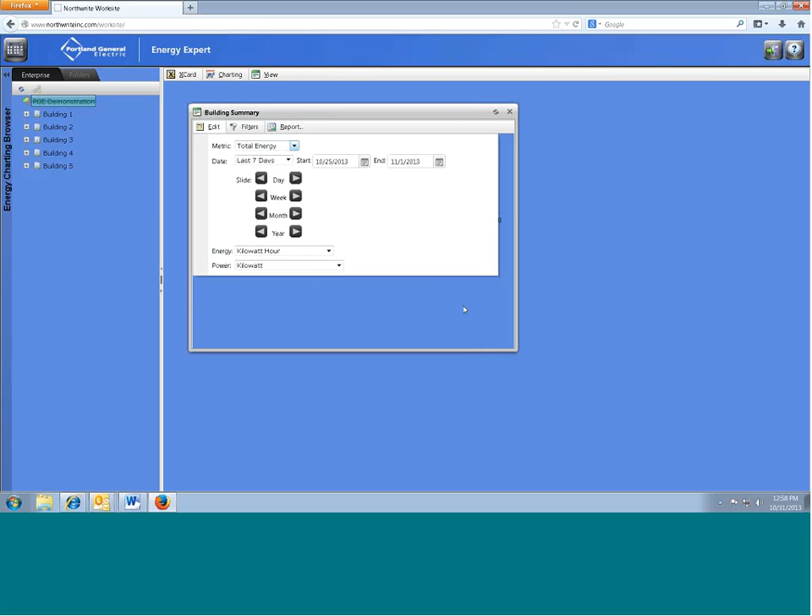And so as long as we are able to get your square footage of your building, we can input that and we can provide you with those metrics. And that's available on the scorecard too. I think I might have passed over that, but the tool will actually show peak demand and peak energy use index as well.

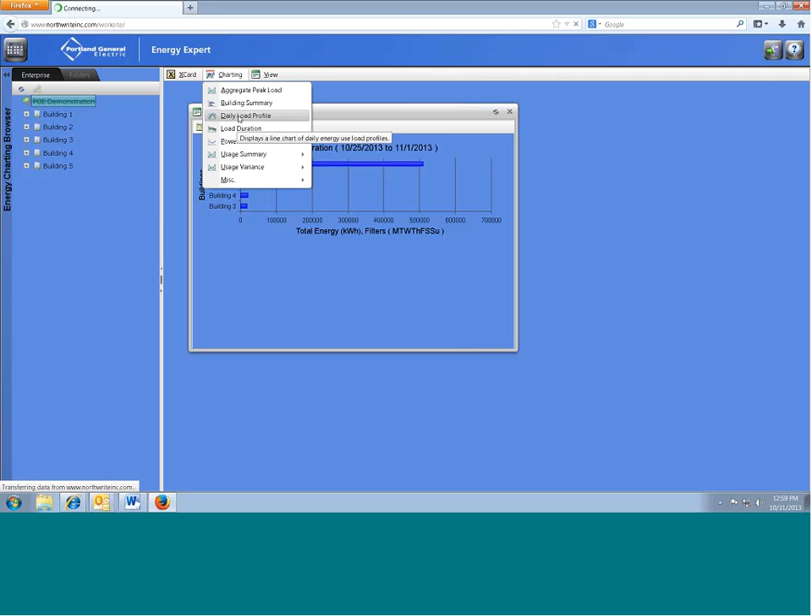The next chart is the daily load profile. This one is a single point chart. This allows you to look at a single day of interest in comparison to a date range. And again, I think we're on a floating last 7 days. So I'm just going to choose last week. And I'm going to choose the filters.

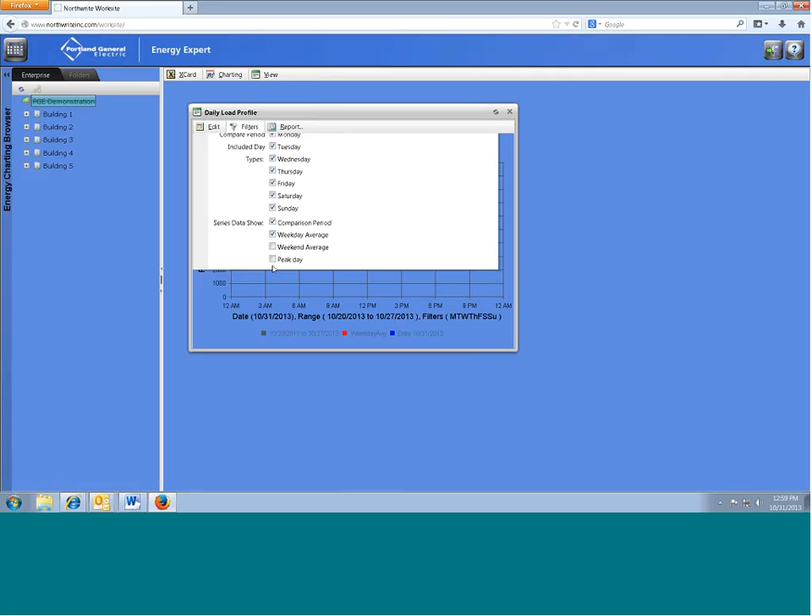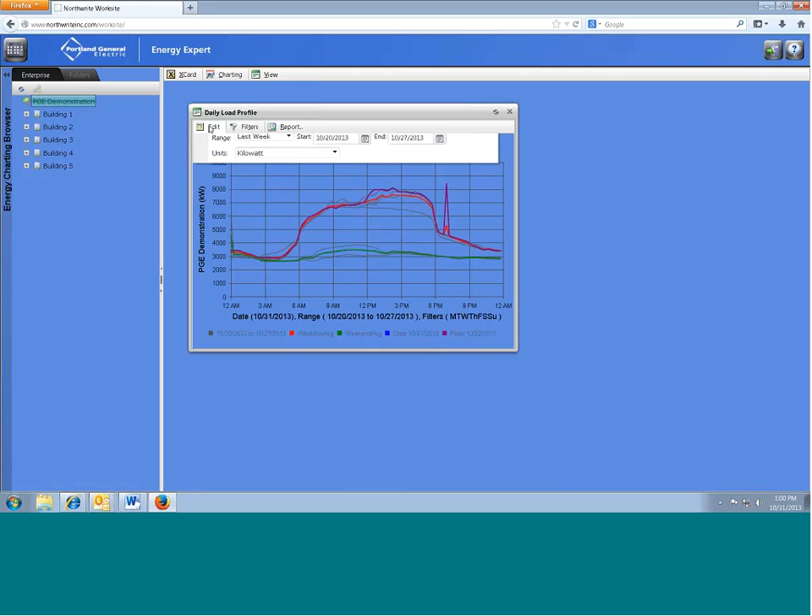This lets you add a weekday, weekend average, and a peak day. And again, you can filter this by day type. And we see there's no blue day here because we're actually on the current day. So I'll just back that up 1 day so that our selected day, where we actually have data, will display in comparison to those averages.

So just another way to kind of identify issues. And we see that spike on the 22nd. So that might be something to look into, if that's real or there's a data issue. It looks like it didn't last long.

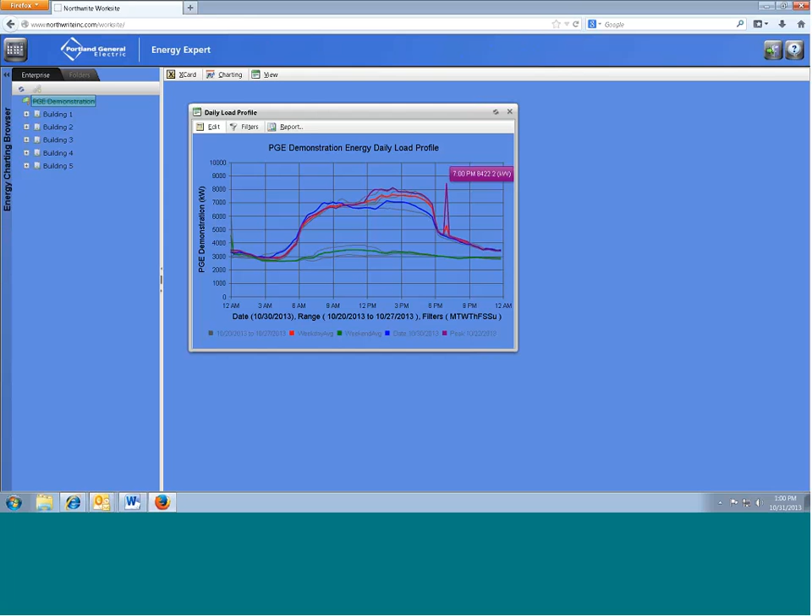Moving down the chart list, we have a load duration chart. And this one is also a multi-point chart, so we're charting the whole enterprise, power use in relation to percentage of the day. Well, actually this is a percentage of the week. So this might be something you'd want to look at in terms of a single day.

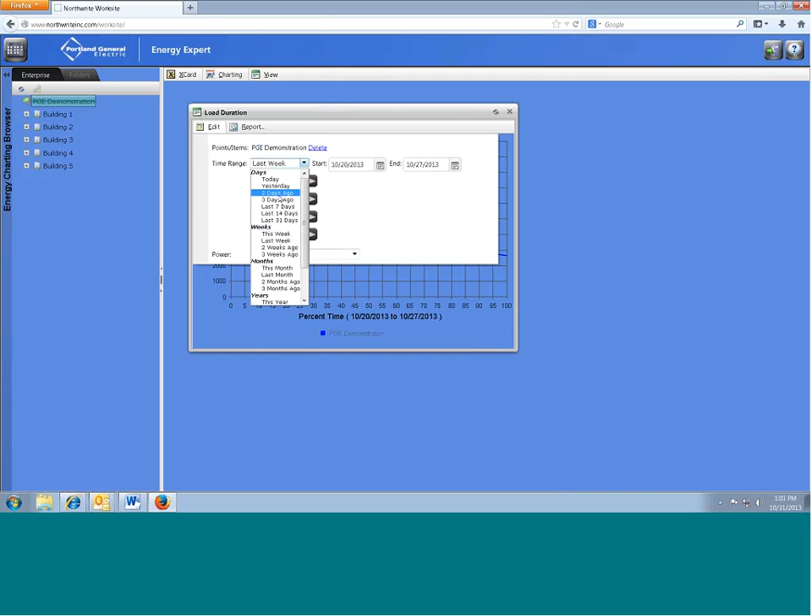I'll look at yesterday. And I can trace this against a single point. And so again, it's going to confirm if I want to add that. And it's going to chart both of them. And so just another way to kind of examine overall power use over the course of a time period selected.

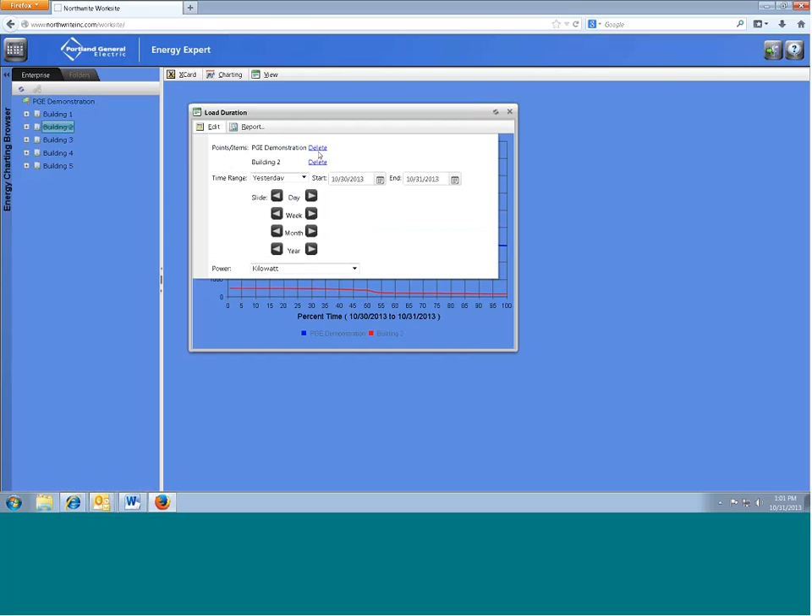We have a big variance here. So again, I'm going to just go up to my edit panel and delete the PGE demonstration, the enterprise point, so that we can look at this in a little more detail. And so, you know, right away we see that here's the base load at about 151 kW, and that's the base load occurring for at least 90% of the day.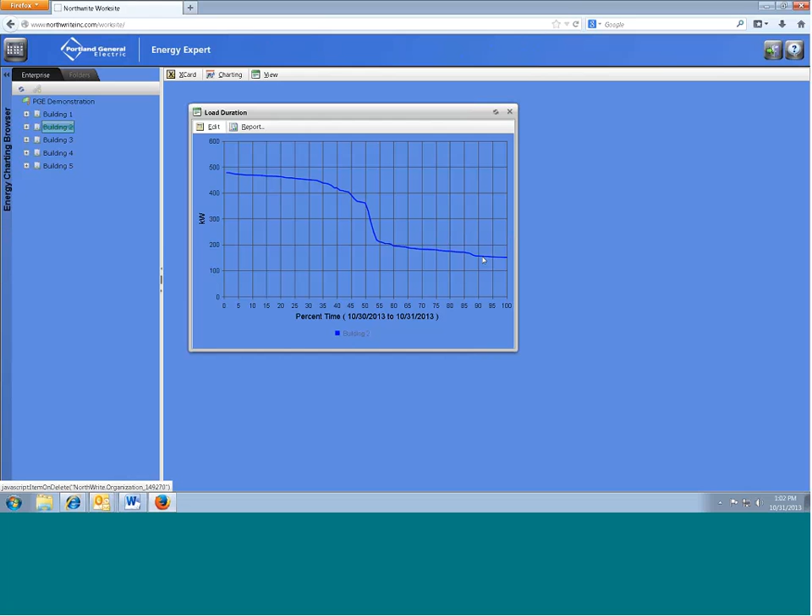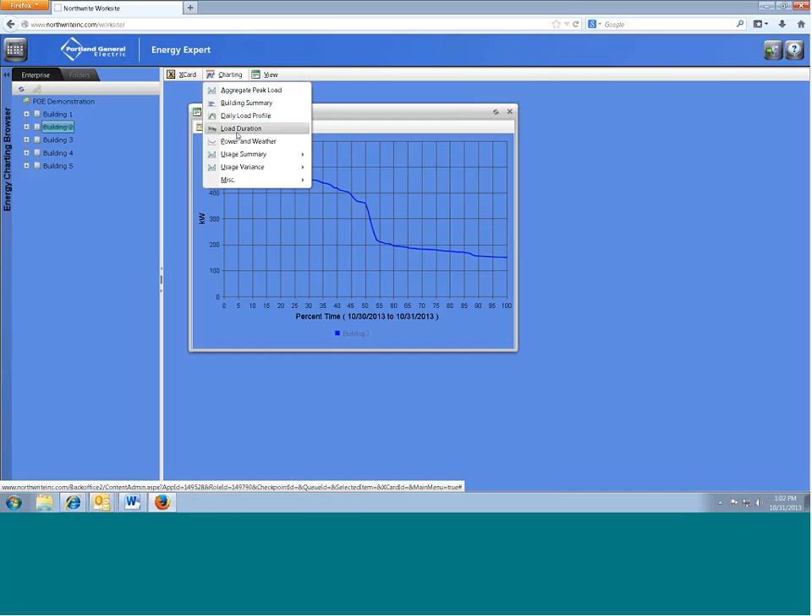Next chart I wanted to show you is the power and weather chart, and this one will alert you if you're anywhere above a building level, because we're going to be looking at weather stations by location. So you have to be at a building or point level in order to get this power and weather chart to display. This just pulls the hourly weather data from your nearest weather station. In most cases that's going to be the Portland International Airport, but depending on your address, that would determine the weather data we're receiving for both this chart as well as for the model data we use in the energy modeling tool.

This is a different weather chart where it's in relationship to power use, but it's also a way to access the weather data if you want to download it from the site. This is where you can retrieve that data in 15-minute intervals, or however you want to actually receive it. We can change the aggregation to hourly if you want hourly data.

I think it's going to load here very soon. If it doesn't, I'll move to a different chart. But this one is also a multi-point chart where you can trace over different locations using the same process of highlighting on the left, confirming to add it to the chart, and it will display in a different color and provide a color-coded legend on the bottom so you can follow what you've added. So the functionality is pretty much repeatable throughout the application.

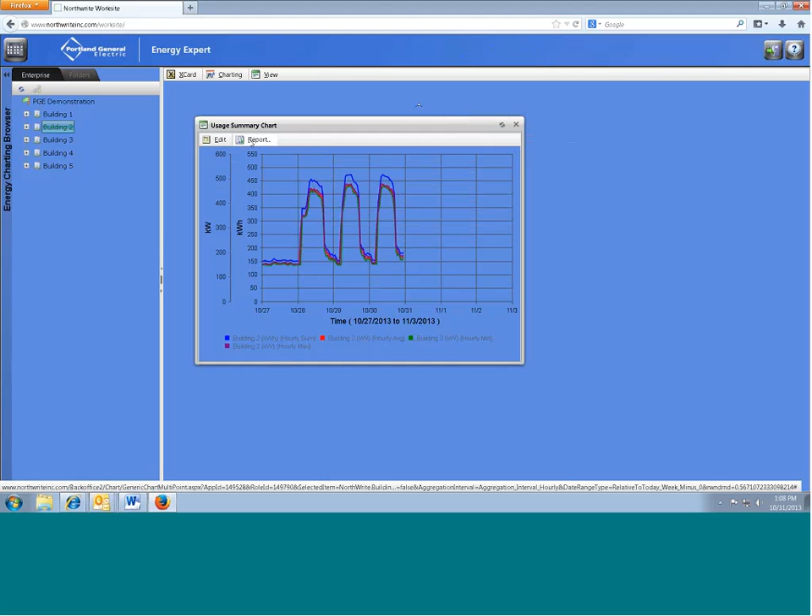Just to give you an idea what the usage variance looks like too, we can do this week versus last week. Again, this would be a daily aggregation, so since we aren't finished with this week, this blue line doesn't continue, but as you roll over this, it will actually give you the actual values for that day.

And finally, the last option here is the miscellaneous charts. These are really just some ways to look at raw data. The one I'll go through is the single point viewer.

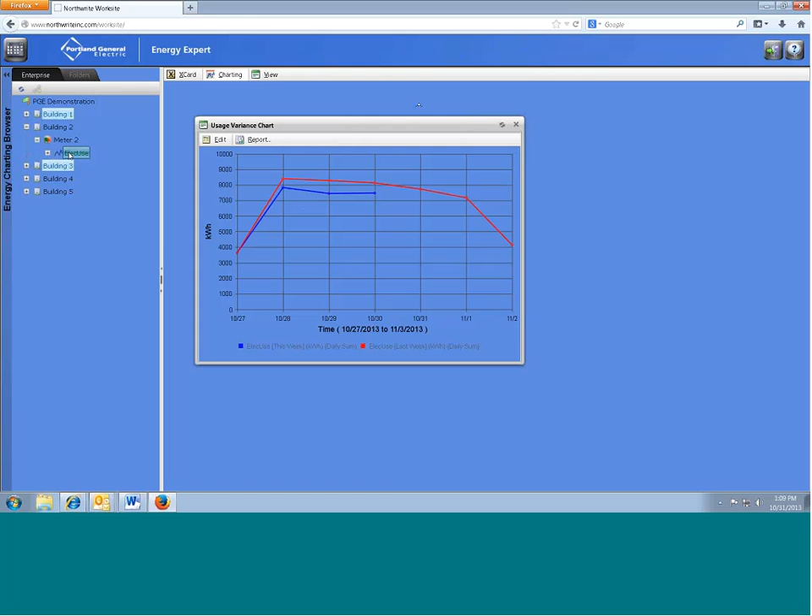This is one where it allows you to add alarm limits to a meter that would notify you in case you exceed those. You do have to be on the left-hand navigation at an engineering point in order to assign those threshold levels. If you're at a building or an enterprise level, you wouldn't be able to access the single point chart.

But I'm highlighted here on an electric energy point, and I'm going to select the single point viewer. First it's going to chart that data series here for me for yesterday.

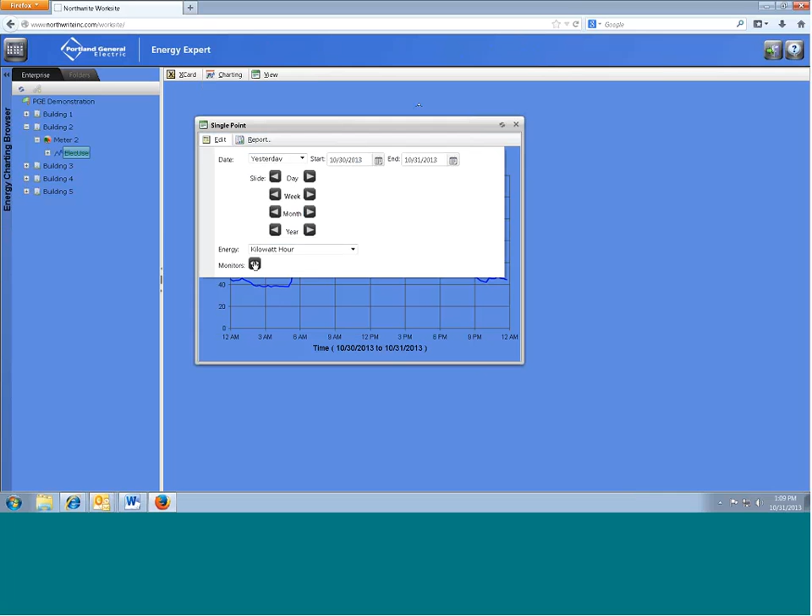Then if I want to set up an alarm for this meter, I go to the edit panel again, and down here on the lower left is a monitors icon. I click on that, and I'll get a form that will allow me to set up a high or a low value in all these different units available.

This can be energy or demand, and entering this value and populating the Create X card checkbox would allow the X card to be delivered to the email address that you specified in the My Profile application when the event is triggered.

So depending on how we're getting the data and what time of day the event occurs, the chart would be indicated that it's in alarm status if your load profile is above that alarm limit. And then you'd also be getting a notification in your email.

I should have mentioned, this can be specified in terms of duration as well. The default selection is as soon as the power or energy exceeds your value limit in a 15-minute interval, we'll be sending you that notification. But depending on the duration, the notification wouldn't go out until the power or energy consumption continues for these different periods that you can select.

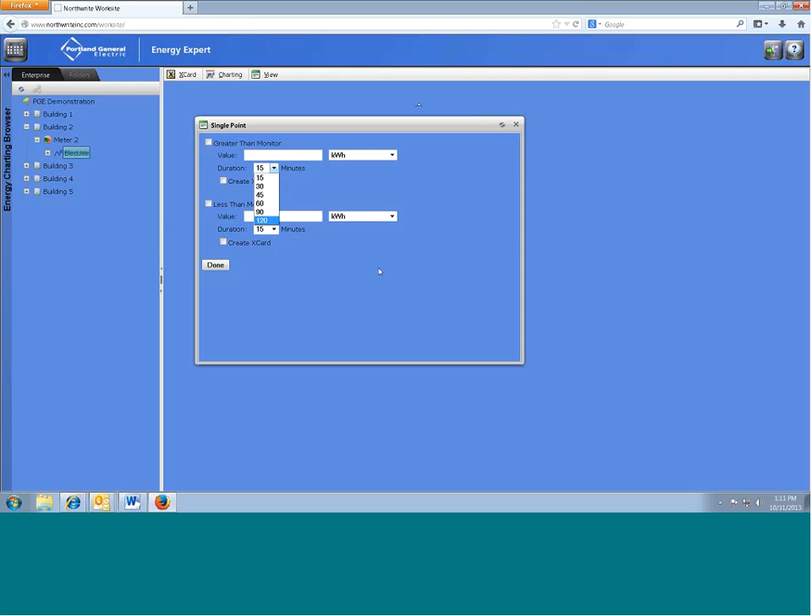So that's just a way of kind of automating your actual hourly consumption by getting an email alert.

And some other headings up here we haven't gone over. The snapshot is similar to the X card that we took in energy modeling. This will also take a snapshot view of this chart and put that on your desktop.

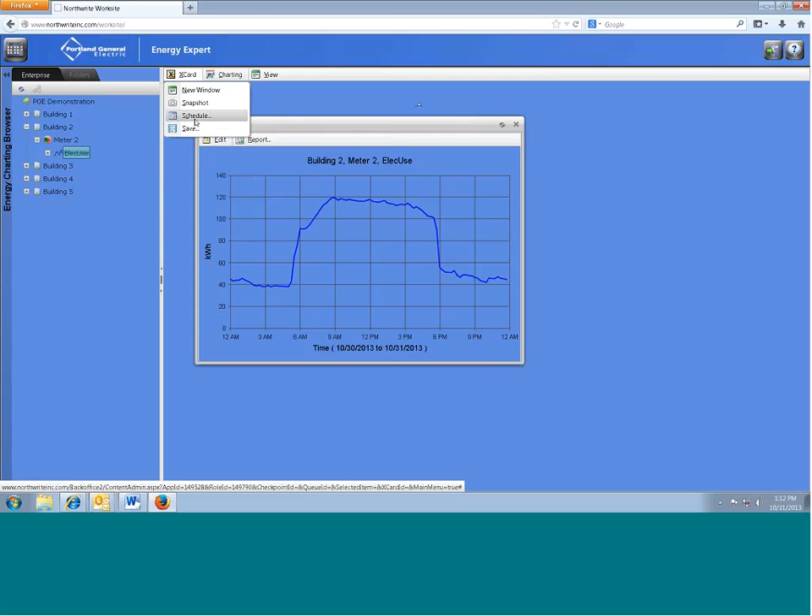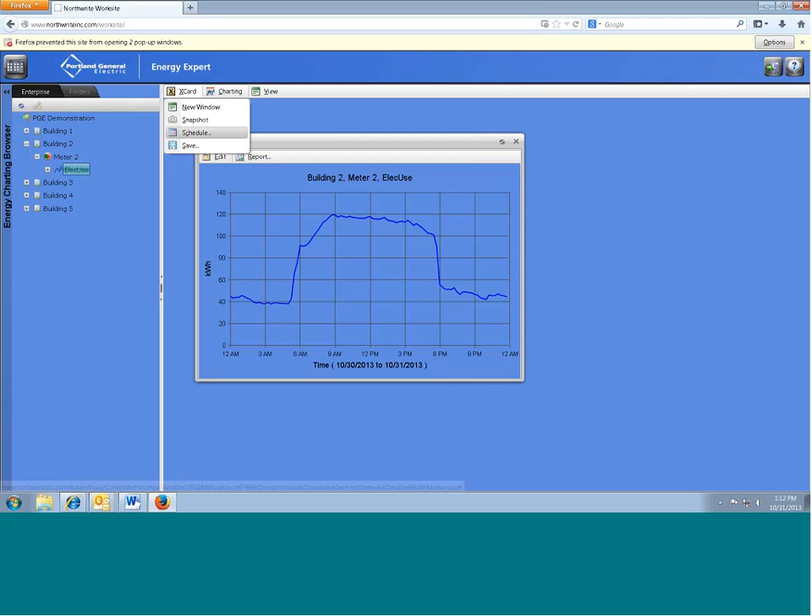You can also schedule an X card the same way we had before in energy modeling. If there's a chart here that you want to receive on a recurring basis, you can do that by scheduling the X card. So I think that brings us to pretty much the end of what I was going to cover, but I'd pause and see if there's anything that I missed or that anyone wanted me to cover.

No, so I'll pass the presentation back to Beth then.

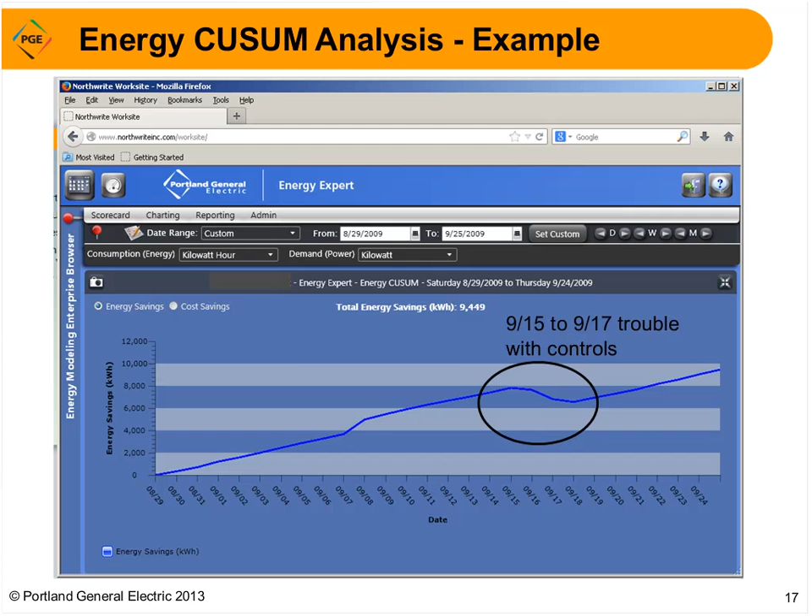The more we've noticed, I think Will and I both, the more people that are engaged and watching their data and receive the scorecards on a regular basis are the ones that are finding the issues and preventing energy loss, as well as tightening up schedules and seeing positive energy savings results.

So knowing what your baseline is, that's an important one, and that's something you can check with Will on to be sure that you've got the right baseline.

You also would want to just schedule some notifications. We have the directions on how to do that in the training guide. And if you have any questions on that, you can also contact either Will or myself.

And looking at your CUSUM, that's another way to generate, I think, savings momentum. If there are successes in the facility and showing those impacts of those measures in dollars and energy goes a long way. Sharing that information can create an energy savings atmosphere and momentum. So those are important things.